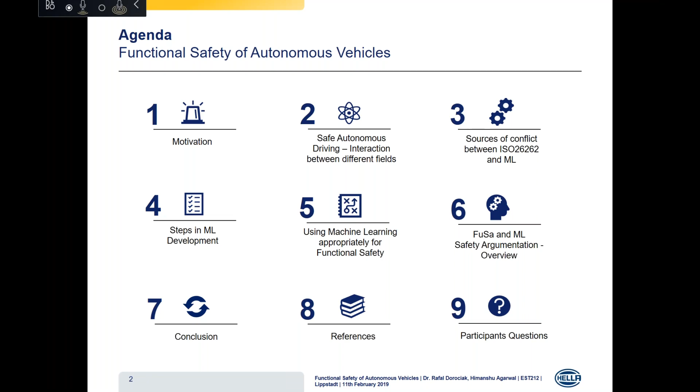And lastly, we would conclude with a quick review, and then would be open to any questions from the attendees here. So talking first about the main goal of the functional safety activities.

The ISO 26262 vocabulary relates functional safety to the absence of unreasonable risk due to hazards caused by the malfunction behavior of E&E systems. These hazards could be due to some random hardware faults, some random software faults, and maybe systematic faults during the development and in the production.

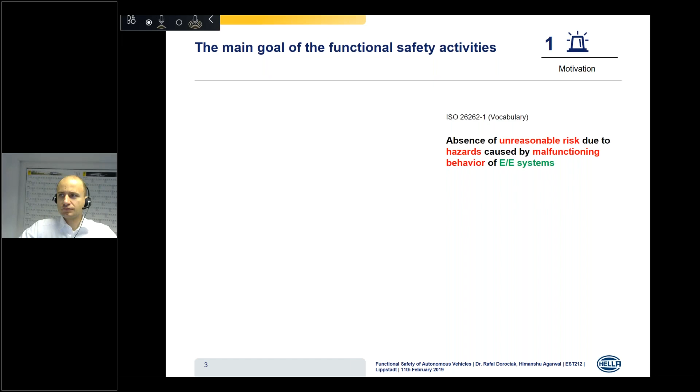In this context, risk is defined as the combination of probability of occurrence of a harm and its severity.

In this graph, the upper right region is the area where system risk with high severity and high probability of occurrence could be found. In the lower left region, we see the area of tolerable risk, which is basically the target of functional safety activities.

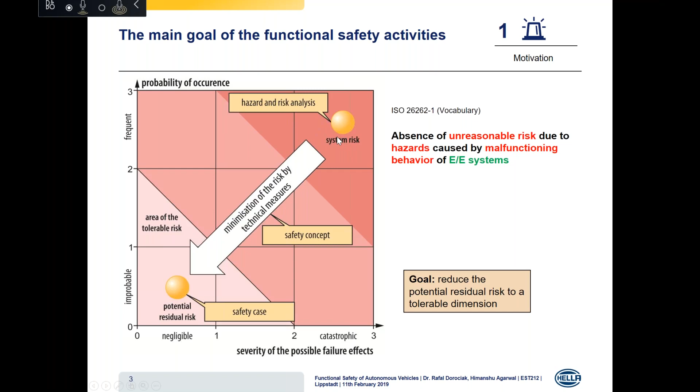Now the idea of functional safety begins with the hazard and risk analysis of such system risk. The result is basically a list of safety goals with the ASIL level assigned to them. Then the initial system risk is reduced by certain technical measures, which we call the safety concepts.

The overall concept of these functional safety activities is to reduce the potential residual risk to a tolerable dimension. At the end, we would get a safety case that shows that the safety requirements important for any system are completely met, and that they satisfy the entire chain and the operations required properly.

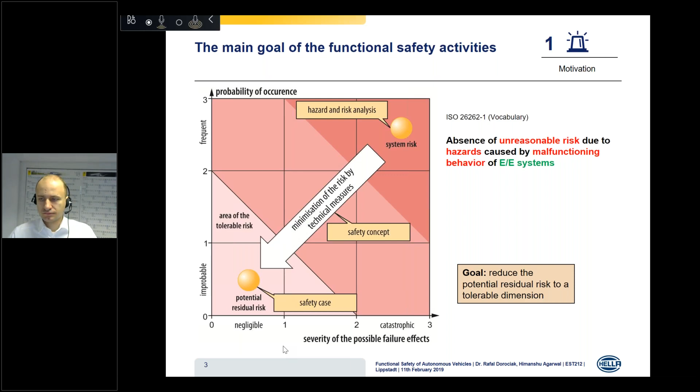So yeah, talking about the general safety life cycle that we use for advanced driving assistance systems during development and production. This is basically the safety life cycle that ISO 26262 generally proposes.

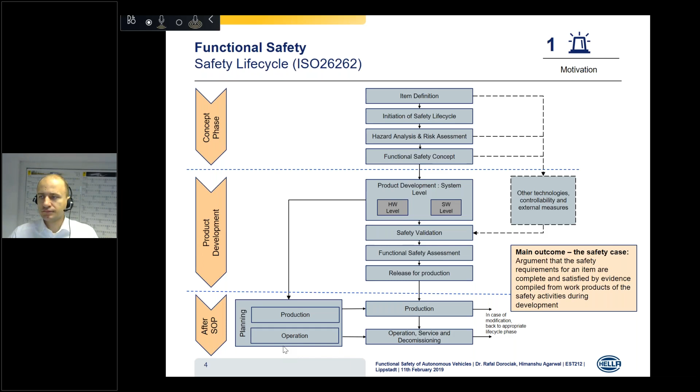So now we see that there are certain safety relevant functions in the system. When we see some safety relevant functions in the system, we start with our functional safety management, which is basically this life cycle. As you can see here, we have three phases: the concept phase, the product development phase, and the after start of production phase.

So the concept phase includes basically the definition of the function on the vehicle level and the definition of safety goals. So we have the main results here as the item definition, the hazard and risk analysis, and then we also have the functional safety concept, which is very important.

So item is basically a system or an array of systems to implement the function at the vehicle level. And then this hazard and risk analysis identifies and categorizes the hazards that the malfunctions in an item can trigger. And also we formulate the safety goals related to the mitigation of hazardous events here.

And then we have this very important step, which is the functional safety concept, wherein we specify the functional safety requirements with the associated information and also their allocation to various architectural elements and the interaction between them to achieve the safety goals. This is definitely very challenging when it comes to machine learning or AI systems due to the complexity in decision-making algorithms. We would come to this point again in the further slides, but just to give an idea here.

Then in the product development phase, we first have the product development at the system level, where the specification of the technical safety requirements basically takes place. And we also design the system here.

Then based on the complexity of the architecture, the requirements for the subsystems are then iteratively derived at the hardware level and at the software level. So we can use here approaches like FMEDA for a quantitative evaluation of the hardware and maybe some software safety analysis for software architectural metrics.

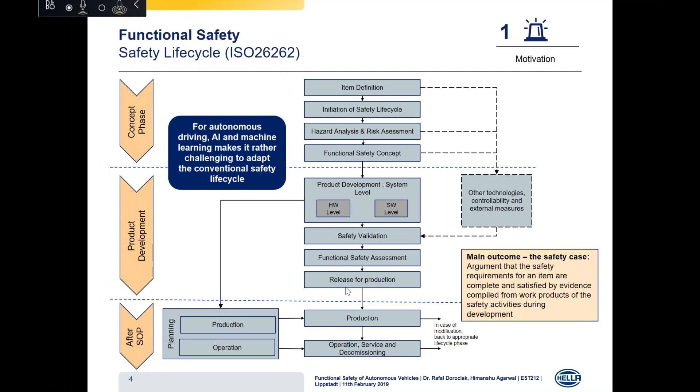So now we know how functional safety is carried out, but why do we do it? Obviously, public safety and driver safety are always of highest importance to us, but there are also consequences that companies are liable to in case these safety goals are not achieved. These consequences may be economical or jurisdictional.

So for example, in the economical consequences, we could have some economical losses with regard to the revenue, the market position, and the company's image.

While from the jurisdictional point of view, the consequences range from both civil law and criminal law. By civil law, it could be the liability regarding warranty in terms of performance, quality, and durability. And then in the product liability, the companies are responsible for the compensation of the consequential damages and the losses. However, from criminal law basis, the companies could be imposed with sanctions in the form of financial penalty or prison sentence.

Looking at these consequences, one thing we are pretty much sure of is that the field of autonomous driving has to encounter a significant number of challenges before we could actually make them a reality. Building trust amongst users, societal acceptance, safety, security, reliability - there's so much that has to be done with regards to autonomous driving. The development of strong AI systems has to be aligned with all such aspects to ensure that self-driving cars are totally capable of replacing human drivers on roads.

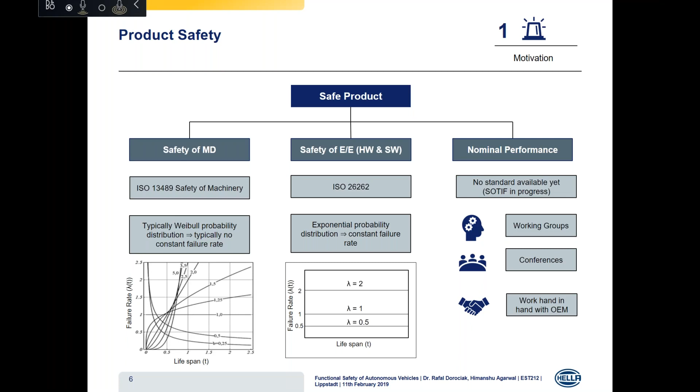Now coming to an important point, talking about the safety of autonomous driving - this requires an interaction and a quite efficient synergy between various fields. The three important fields are: first, AI ML, which is obviously the most obvious case; then we need to have a good background on functional safety as per the ISO 26262 norm; and the last one is SOTIF, which is the safety of intended functionality. As I said, it's still in progress and not completely developed, so we have to talk about it in detail.

The first thing is development of ML AI algorithms for autonomous driving. We develop algorithms, then test them and test their behavior in different platforms.

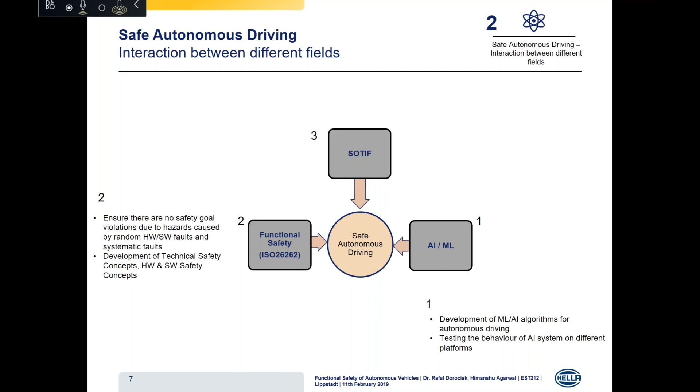Next up is functional safety, where the idea is basically to ensure there are no safety goal violations due to hazards caused by random hardware, software faults, and systematic faults. We follow the safety life cycle in general, and as we saw in the safety life cycle, we had a phase known as the functional safety concept. With relevance to that, we develop the technical safety concepts and also the hardware and software safety concepts within functional safety.

Then the next one is the SOTIF thing, which is very important in autonomous driving. Here we deal with advanced concepts of complex automated driving architecture. We also discuss the approach for evaluation, verification and validation of SOTIF-related risk. Basically at the end, we must formulate a criteria so that we can have a smooth release of autonomous vehicles into the market.

And then we need an efficient synergy between all of these fields. So talking about the first interaction, it would be between functional safety and AI ML, which is the agenda of this presentation as well. The idea of this interaction is basically to develop and implement machine learning techniques by avoiding systematic failures.

Also in this presentation, we are going to propose some ideas on how we can use machine learning appropriately for functional safety. That is the core idea of this interaction. We define the functional requirements for risk assessment and also talk about the confidence in the software tools we are using for designing our algorithms or for collecting data for training. In general, for functional safety, we have technical safety concepts, hardware safety concepts. But when we have AI systems into consideration, we also have to develop safety concepts for ML and AI exclusively, needing an exclusive step in the process.

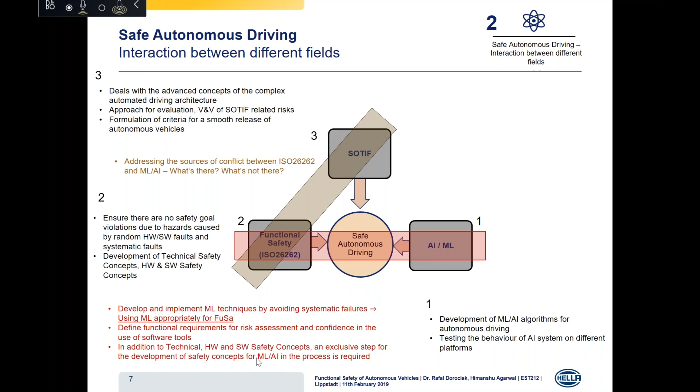But anyway, we get into problematic situations because, for instance, one of the biggest examples considered in SOTIF is that we are using technologies that are limited, like radar, camera, LiDAR. We are not able to 100% know that the environment has been recognized correctly. All of these technologies have pros and cons, as probably the majority of participants know. And here the focus is, even if we assume hardware and software are everything correct, we are also able to cope with the limitations of these technologies.

And of course this topic that is today in the focus of the presentation—artificial intelligence, machine learning—is, if at all, considered only a little bit in the other two areas. There are some interfaces, but especially here there is no silver bullet solution yet. There is no standardization. Everybody is struggling with these topics because we don't have the deterministic software development anymore. Himanshu will also show in the presentation that in classical neural networks we are not even able to take a look into this black box and check how the decisions are made.

Then there's also the topic of training data, how to cope with that, how to make it at the end of the day safe, so there is no potential of violating the safety goal, no potential of giving harm to people and the environment. These are topics that are very challenging for us. We also see in the whole community that everybody is struggling with this and doing research on this topic. So this is going to be the focus of the following slides in the presentation.

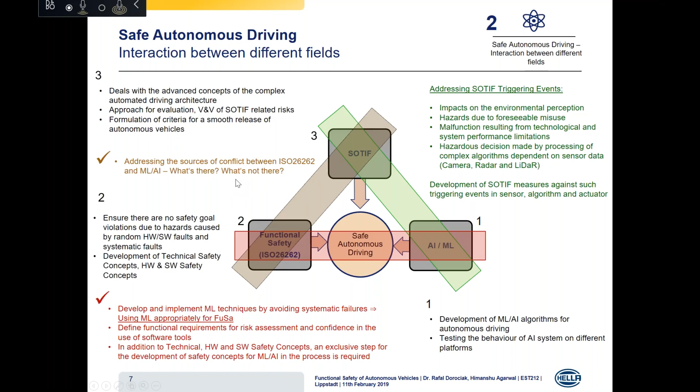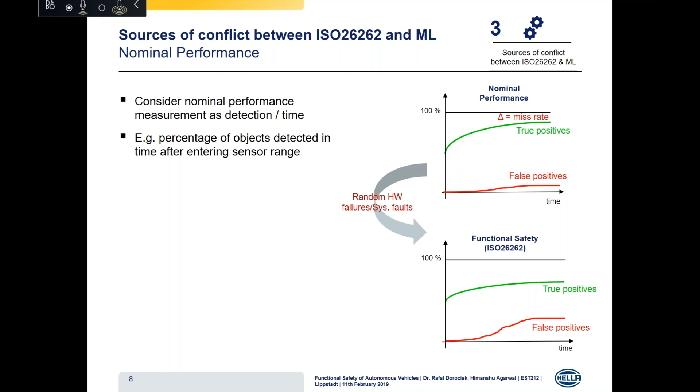However, when the nominally performing system is subjected to random hardware failures or systematic faults, we see a significant degradation in the detection results. The false positive detection relatively increases, and the miss rate delta is now higher. This is a very serious concern when it comes to functions in autonomous driving from the safety point of view. We refer to this as degradation of nominal performance, which is quite undesirable in functional safety.

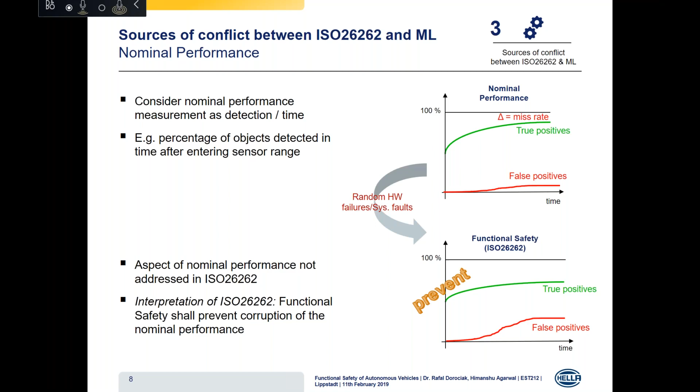The issue is that the ISO 26262 standard does not address the aspect of nominal performance at all, because of which we cannot completely prevent this degradation from happening. So this source of conflict demands an absolutely necessary interpretation in ISO 26262, such that when we perform functional safety in automated vehicles, we can completely prevent the corruption of this nominal performance. That's the first source of conflict that we mention here.

The next one is technological limitations, as Mr. Dorociak also said. These limitations are related to the sensors, algorithms, or the actuators. We would like to take this opportunity to give one such example.

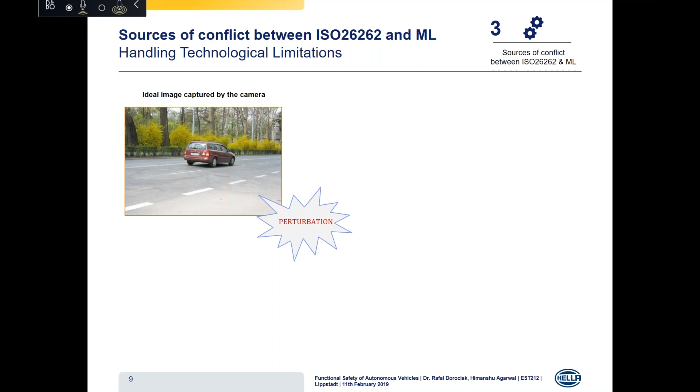So that's clearly a technological limitation. Since most decisions in autonomous vehicles are based on non-deterministic algorithms, such situations are a matter of serious risk and concern in safety argumentation. But unfortunately, the ISO 26262 standard does not consider such technological limitations. Hence, addressing this source of conflict in future releases of ISO or SOTIF is of utmost importance. This involves development of adequate SOTIF measures in the future, and future guidelines would help us establish a more rigorous framework for functional safety. But as of now, it's an open subject.

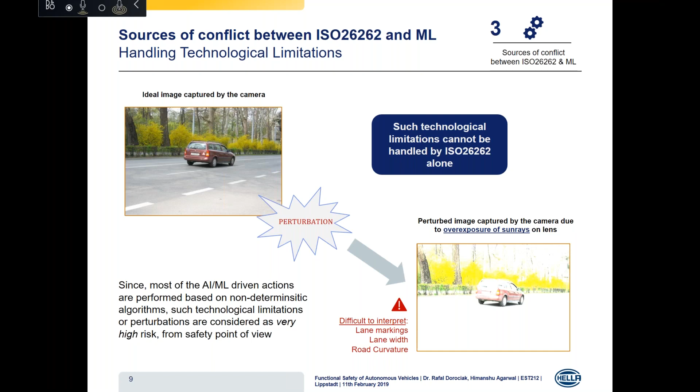So yeah, next conflict we would like to talk about is related to safety requirements management. Conventionally in functional safety, it is very important for us to have well-defined and unambiguous requirements. Only then it is possible for us to trace back the right side of the V model to check if the left side turned out to be proper or not.

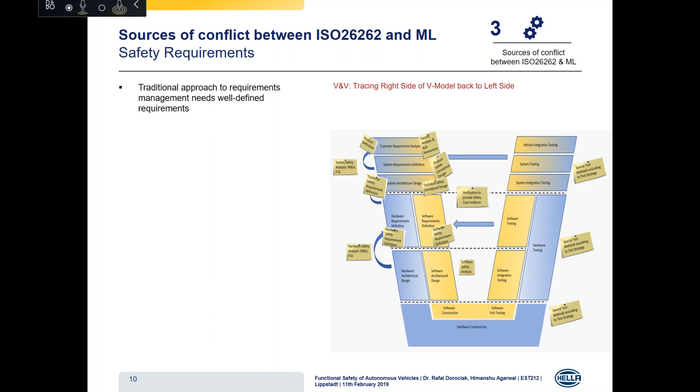But for autonomous vehicles, it would be rather challenging, for instance talking about machine learning or AI techniques. In case of AI/ML techniques, the requirements would be different from the conventional form of requirements. For instance, the requirements for machine learning would be that of the training data set, what neural architecture has to be used, or what approach to use for training, the internal neuron activation functions, weights, etc. So it's not clearly what we see in the conventional requirements.

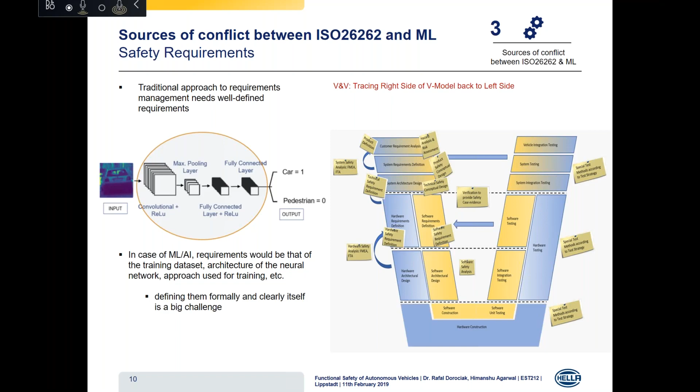So as a result, defining them formally and clearly itself is a big challenge for us, owing to the black box nature of the decision-making neural nets. So this non-determinism in the decision-making would pose a significant challenge for the requirements management of autonomous vehicles.

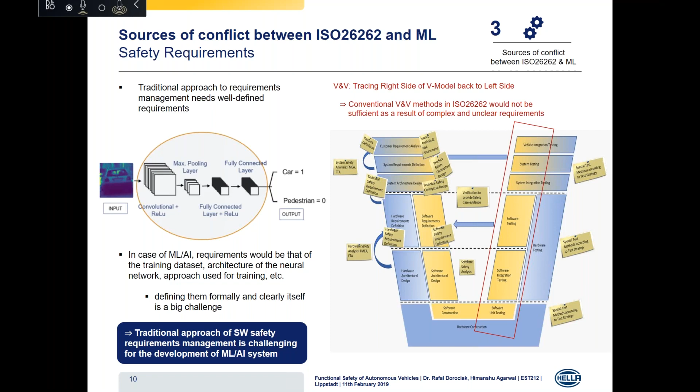So as said, the conventional verification and validation techniques in ISO would not be sufficient, as per the ISO 26262 norm, and we have to talk about the functional safety of automated vehicles in another aspect, which is the SOTIF. That's again another source of conflict.

Now since autonomous driving technology significantly depends on machine learning for applications such as object classification, signboard detection, etc., it is crucial for us to address these typical steps related to the development of ML systems. Also, evaluation of these steps would help us find ways to avoid systematic faults in ML systems. These steps are partially adapted from the ISO 21448 SOTIF draft.

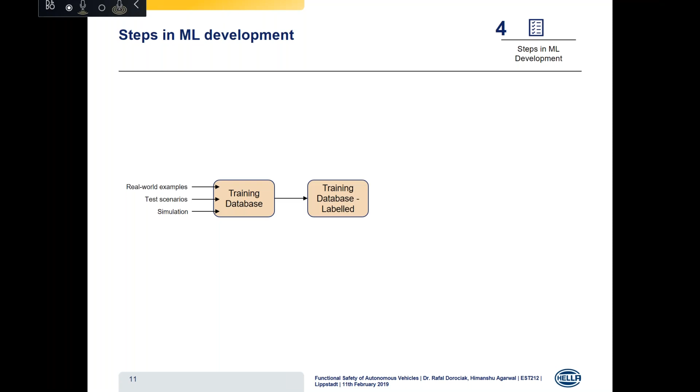Beginning with this process, the first step is the collection of the training data using real world on-road examples, test scenarios, and simulation. This is followed by labeling the training database for specific features that are to be learned, such as road boundaries, vehicle type, etc. The label data is then used in the configuration steps where the parameters or weights in the learning network are determined via the training procedure.

Then the result of the training has to be verified with the training data itself, maybe as a pass-fail criteria, or something like an acceptable false positive rate and false negative rate. This step is called self-verification. But obviously, in case of discrepancies, the entire chain of steps can be restarted to collect more training data and/or modify the training approach.

Quite evidently, this self-verification won't be sufficient, and therefore there's a need for a separately collected database, which is our verification database, and the corresponding labeled one. This is done for cross-verification. The results obtained from the trained network using both the training and verification databases are then used for the evaluation and determination of nominal performance.

This is basically a general approach towards ML development. However, there are many training limitations and issues that can be uncovered in it. These steps are of critical importance for the safe operation of autonomous vehicles. From the safety point of view, we would expect that our data is collected and the learning network is developed as per the safety standards so that we can avoid possible hazards.

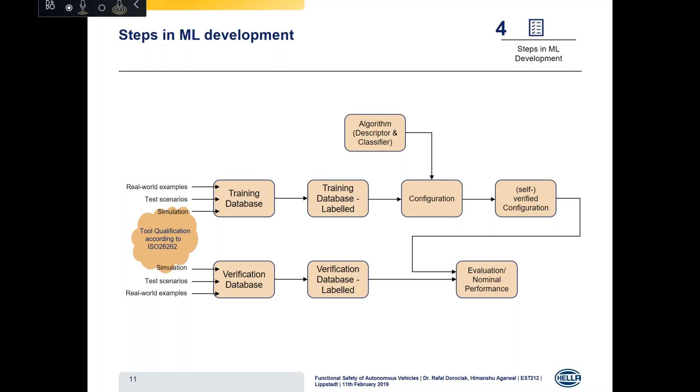Talking first about the software tools used for the collection of data, they need to qualify under the ISO 26262 standard. In ISO there is a Part 8 which exclusively deals with software tool qualification, and it checks if any error in the output of the tool introduces other errors in the safety-related item. Other than that, we have software development that has to follow the ISO 26262 norm. Part 6 of ISO 26262 deals with the software development level.

As we have already seen in the previous slide, within this process, something that's a big issue for us right now is the nominal performance, because that's not covered by ISO 26262. This step would require intervention of maybe SOTIF aspects, but as of now, it's excluded by ISO 26262.

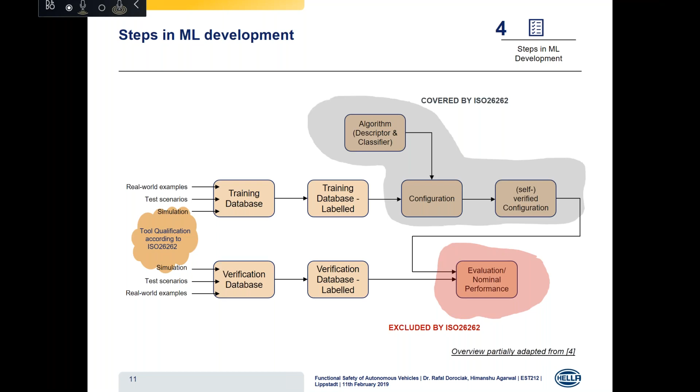So now we would like to give some proposals on how we can use machine learning appropriately for functional safety. In this segment, we are going to mention some important considerations. The requirements for an AI system would mainly be related to the training and verification data sets, so the proposals here focus on strengthening data collection and carrying out systematic data handling.

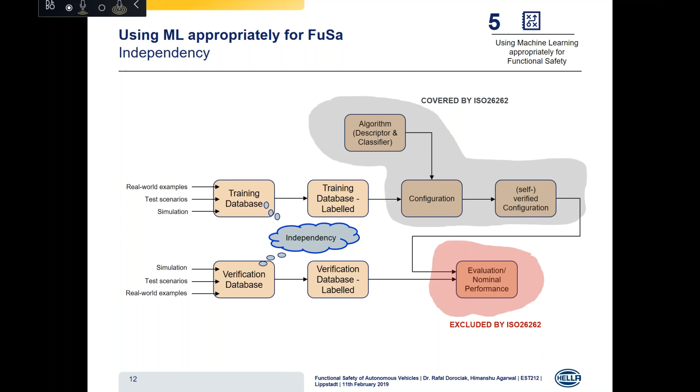The first one in our list is the independency between the training and verification database. For safe decision making, we would expect an unbiased learning process. From the safety perspective, this is of critical importance. Therefore, at the data collection stage, we must investigate and implement ways to achieve a higher degree of independence between the training and verification database.

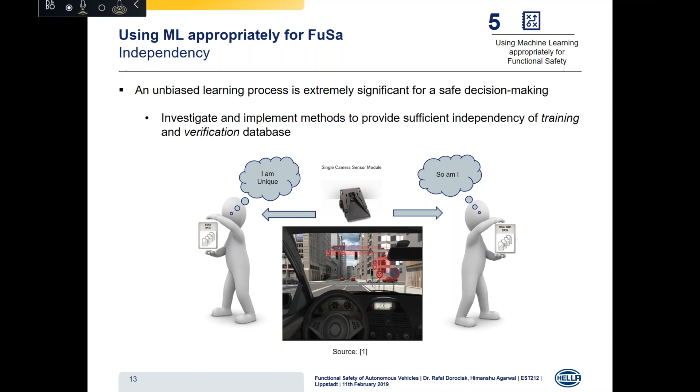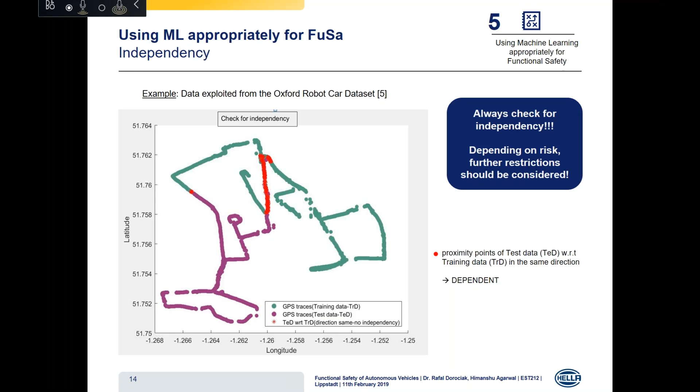The next one in our list is the aspect of adequate coverage. Many would agree this is often very challenging to acquire, as there are innumerable situations or rare case scenarios that a human driver can encounter while driving. Translating all such scenarios to an autonomous system would be very challenging as they are humongous in number. Nevertheless, a safety argumentation is incomplete without addressing this issue.

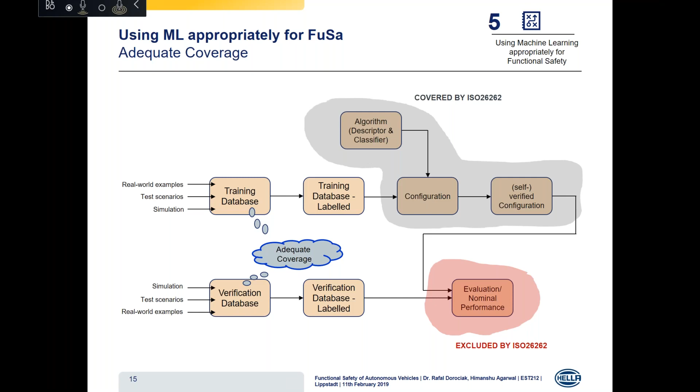Adequate coverage means the database must have good coverage taking into account diverse aspects - things like localization, type of area, adverse weather conditions, daytime, season. So enhancing the coverage is important, and maybe we can use synthetic data generation for this, such as generative adversarial networks, though we'd need to make them very efficient and robust for synthetic data generation.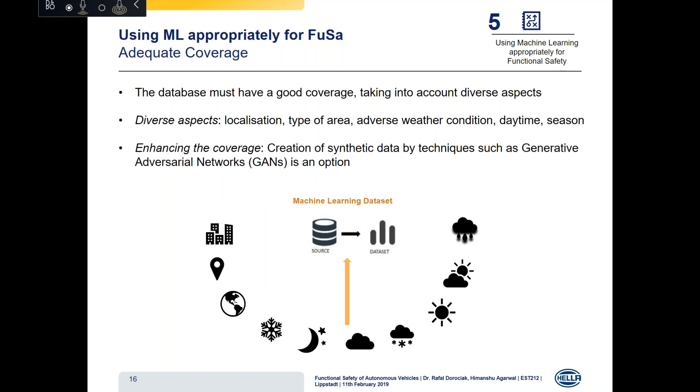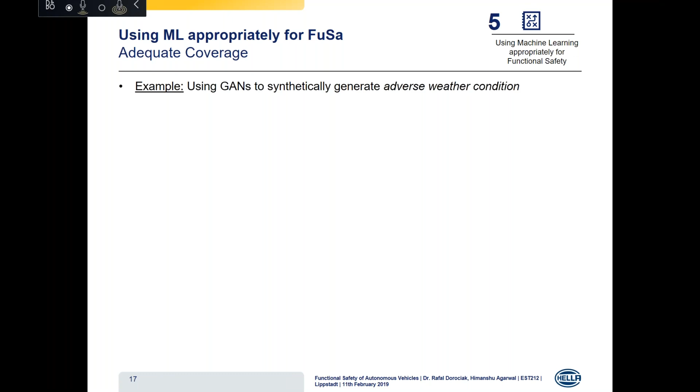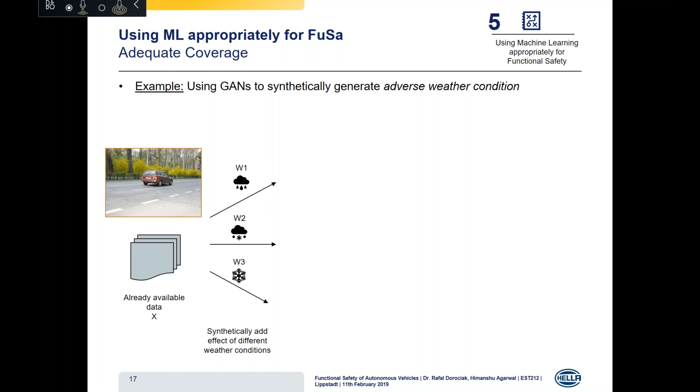For example, this is just an idea we can propose - GANs to be used for adverse weather conditions. Suppose we already have some training data available; we can synthetically add the effect of different weather conditions such as rain, fog, snow, mist, and plenty of others. When we have these effects added, we get a new set of synthetic data - if it was 100 originally, we could now have something like 400 training data points with various weather conditions embedded into it. This is possibly one approach, but it would require a lot of work in development and properly tuning the hyperparameters. This is just a proposal, an idea we can use.

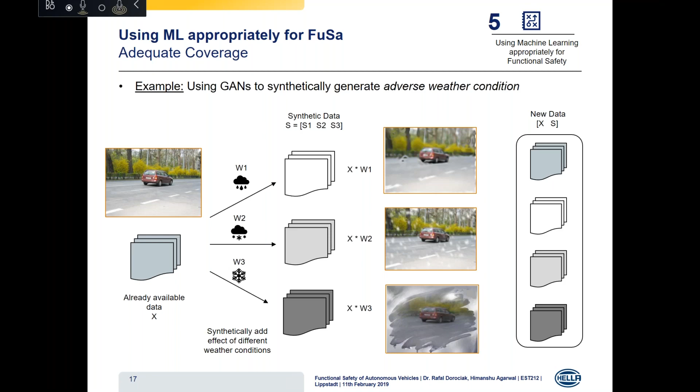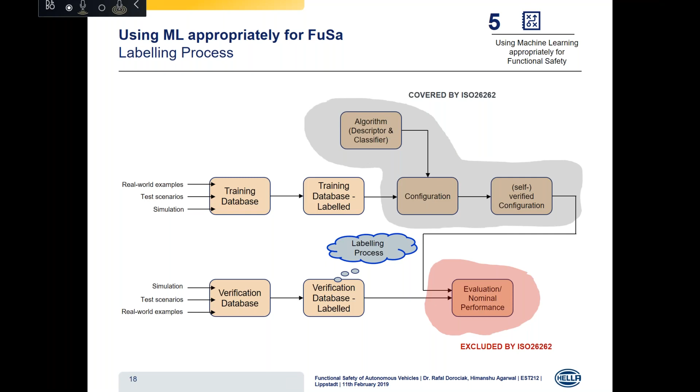Another important point is the labeling process, which is also one of our proposals on how we can use machine learning appropriately for functional safety. Labeling is always a big issue for people dealing with machine learning or artificial intelligence, and systematic failures in this labeling process would very much affect the nominal performance of our system. So we have to make sure this labeling process is good and efficient.

Some ideas would be peer review of the labeled data. You can define a fraction of labels for each algorithm, choosing these fractions depending on the level of risk you're exposed to. Also, in case of high risk, you can have redundant labeling by independent persons or different algorithms. The idea is basically to make sure this labeling process is free from errors so we can prevent our nominal performance from getting corrupted.

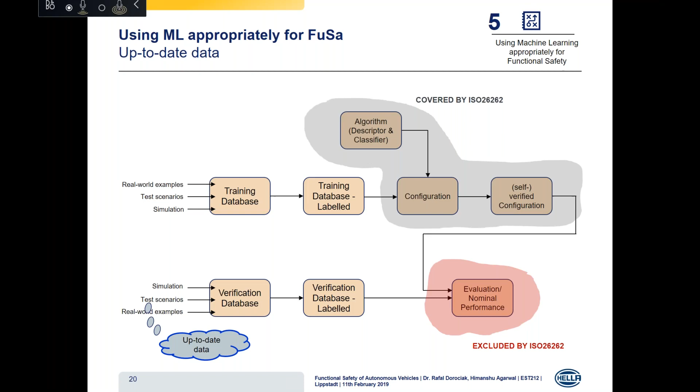Another important point is up-to-date data. This is equally very much important when we're talking about safety considerations. So what about when there are new trends, even in the development phase, when we come across new trends, for example LED traffic signs or new vehicles such as street scooters, we have to make sure our system knows about this.

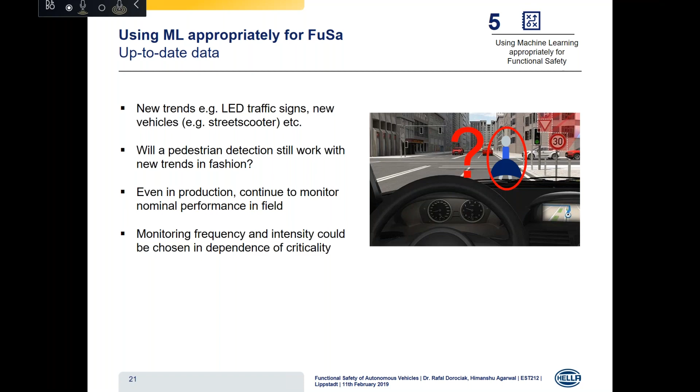For example, in the image we can see here, will a pedestrian detection still work with new trends in fashion? This is equally important to consider. So the idea is that even when your system is in production, you need to continuously monitor the nominal performance in the field. But how frequently do you monitor it, and what would be the intensity of this monitoring? That could be chosen depending on how critical that particular aspect is. But that's equally important, to monitor this nominal performance in the field during production, so that we have completely up-to-date data at all times.

So just an overview, we have talked about the four proposals related to the collection of training data sets and how we can systematically handle the data. These four are: independency, then adequate coverage, the labeling process, and the up-to-date data.

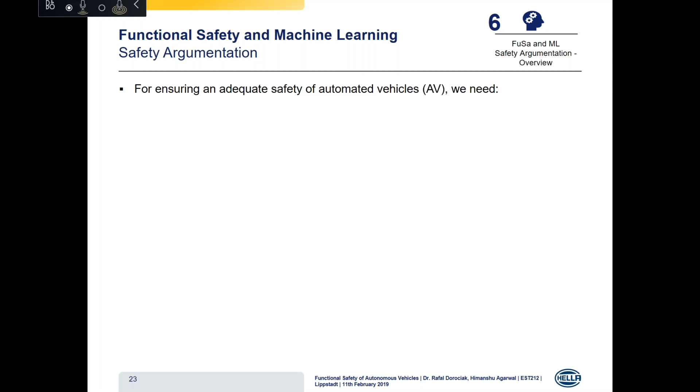So at the end, just to see a kind of accumulation of all the ideas we have presented here. For ensuring adequate safety of automated vehicles, we need these six important points from the safety point of view. The first one is systematic data handling. Here we would avoid systematic failures by ensuring adequate coverage, independency, efficient labeling process, and up-to-date data, as we already spoke about in the previous slide.

Then the next step would be completeness. We must have a complete description of the system and what are its abilities. We must have well-defined specifications and requirements, which is obviously very challenging, but from a safety point of view it is very much required. We must have good knowledge about the components that we use and the interconnection between the various components.

The next one would be transparency. As safety engineers, we must have good knowledge of how these complex decision algorithms work. So how basically any particular decision is made, or how the features are selected in an autonomous context. All this information is very much required for us. And as I said, we must have robust strategies to deal with the inherent complexity in machine learning and automated driving, such as adversarial perturbations and various environmental conditions like fog, rain, snow. All these aspects have to be considered when designing a machine learning algorithm.

So for safety, obviously we would have to perform a rigorous functional safety analysis. The idea here would be to mitigate random hardware failures and systematic failures, as Mr. Dorociak also said in his slide. So we have to make sure all these things are mitigated and we completely satisfy our safety goals.

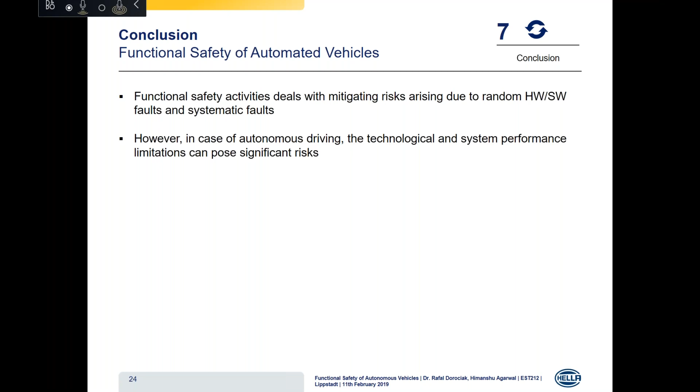However, in case of autonomous driving, the technological and system performance limitations can pose significant risks to us. The safety of self-driving vehicles would demand an efficient synergy between the fields of AI, machine learning, functional safety, and SOTIF.

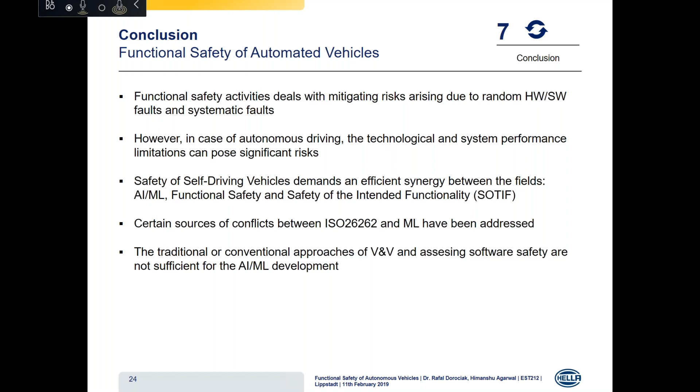We also addressed some sources of conflict between ISO 26262 and machine learning. The traditional or conventional approaches of verification, validation, and assessing software safety are not sufficient for the AI or ML development process. We also spoke about the development process of machine learning and saw its coverage with respect to ISO 26262, and made some proposals on how to use machine learning appropriately for functional safety.

We gave a few ideas related to how to efficiently collect the data and label them properly, but there are many more possibilities, and we have to dig into this particular interaction between AI, machine learning, and functional safety even further.

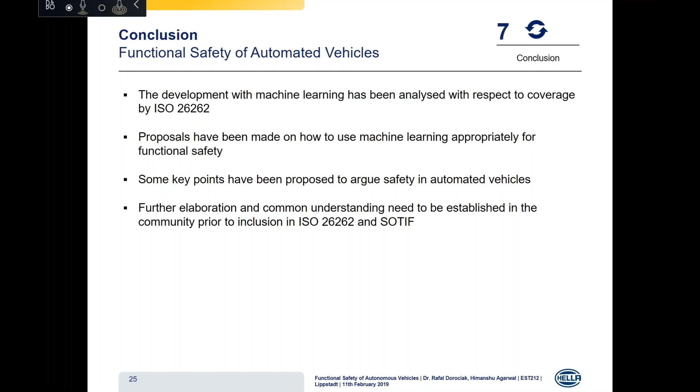We also proposed 6 key points that we mentioned are very important to argue safety in automated vehicles. Further elaboration and common understanding has to be established in the community prior to including all these things into ISO and SOTIF standards.

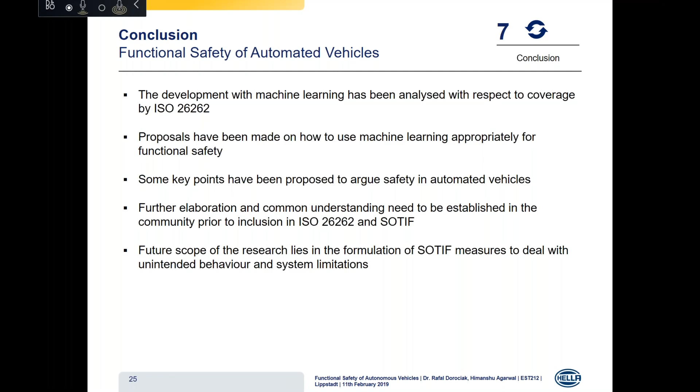So for us, the future scope of research would lie in the formulation of SOTIF measures to deal with unintended behavior and system performance limitations. So that is from our side, and we would now be open to questions. Thank you so much for your attention.

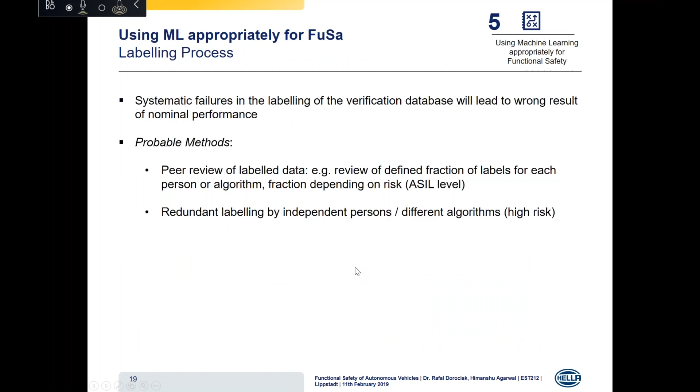So basically, when we talk about this ML development process, an important point from the safety point of view would be to define something known as algorithmic fairness. For machine learning people, I know it's a broad thing that has to be formally described, but from the safety point of view it is equally important for us. We would expect a good formal description of what algorithmic fairness is, so that we can do a rigorous analysis of the safety considerations with respect to that. So this is just one point about algorithmic fairness that I would like to add here.

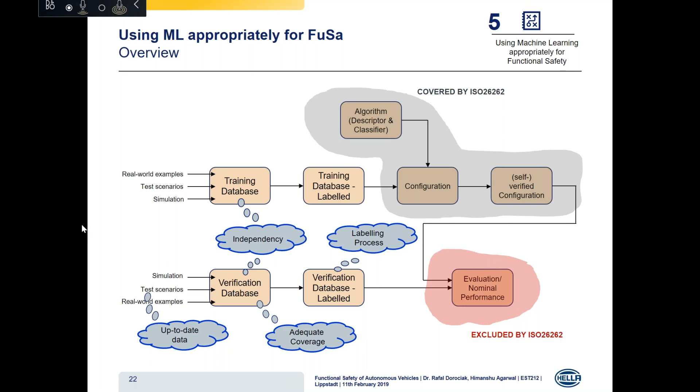Absolutely, we have a question regarding slide 23: How do you plan to check and test transparency? Could you answer that, Himanshu?

Yeah, I got you. It's not possible for neural networks to have a good idea about transparency, but at least we should have an idea on how the algorithms work and how the decisions are made, how the features are selected. I understand it's a black box feature of neural networks, but we have to do a safety analysis of the decision making. We must know what strategies are used for decision making, what kind of neural network architecture is used, what neuron activation functions are used, what approach is used for training. We need a transparent idea of all such things when we do our safety analysis. We completely understand the point of the black box feature, so that's not an issue, but there should be a good...

Basically, this is one of the biggest challenges. Who asked the question? Mr. Stefan Henning. You picked out one of the biggest challenges, definitely. We probably don't have the silver bullet solution today, but we would handle it similarly to SOTIF.

Test a lot, validate a lot. Today in the functional safety field, we don't yet have big trust in machine learning topics, so there's always a second channel built in a deterministic, classical way. At the end, there's a comparison, and in case of any deviations, we go into the safe state. That's the current situation, but for autonomous driving, we need to get better on that.

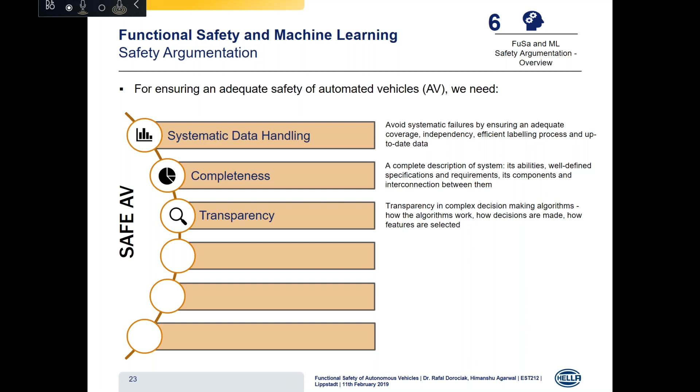We could also say 5G will be central for autonomous driving. We always need to differentiate a bit between what is possible today and what we will need to cope with in the future. If we take the big picture with car-to-car and car-to-infrastructure communication, 5G will also be a big aspect. Then there's the challenge between offline learning, or teaching of the network, and online learning - is it allowed to continue to learn the network during driving when the end customer has the car? Can we in the future also use information from car-to-X communication for training the network and so on?

But these are all future topics, definitely, and everybody is struggling with these topics, and we need to do it stepwise, of course.